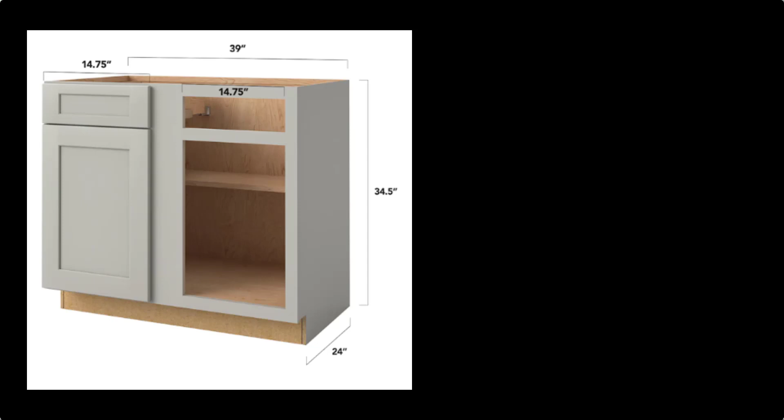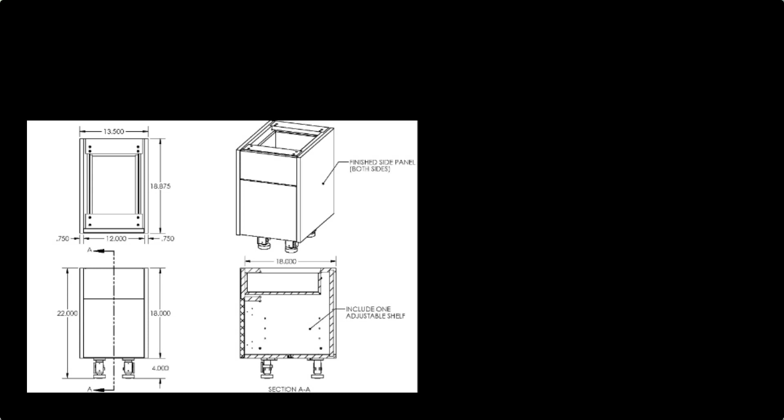Once you know how these little guys are built, you know all the materials, the joinery needed, the assembly. That's when you can start seeing how other millwork projects are made, like closet cabinets and shelving, desks, furniture. It all has the same kind of thought process behind it, just different outcomes. So the goal of this demonstration is so that you better educate yourself, so that when the time comes for you to start planning your own custom millwork, you do so with wisdom and it shows on your elevation sections and details. Those are the typical drawing types needed to help a carpenter build any millwork or casework pieces.

So to give you some background, my family owned a kitchen cabinet manufacturing company. I worked there every summer from 13 years old until I graduated college in my mid-20s. So the cabinet building process I'm about to show you is based on our cabinet building design and process. Please understand there are hundreds of ways to build cabinets, lots of different materials, lots of different joinery methods. This is just one way. So please feel free to look at other woodworking resources for more ways to do the exact same thing I'm about to show you.

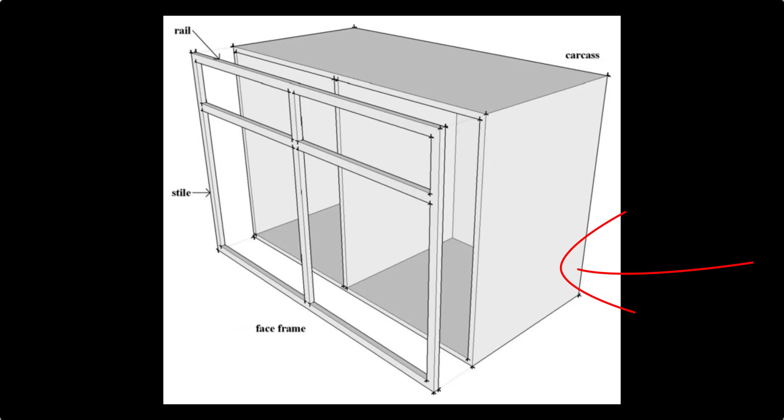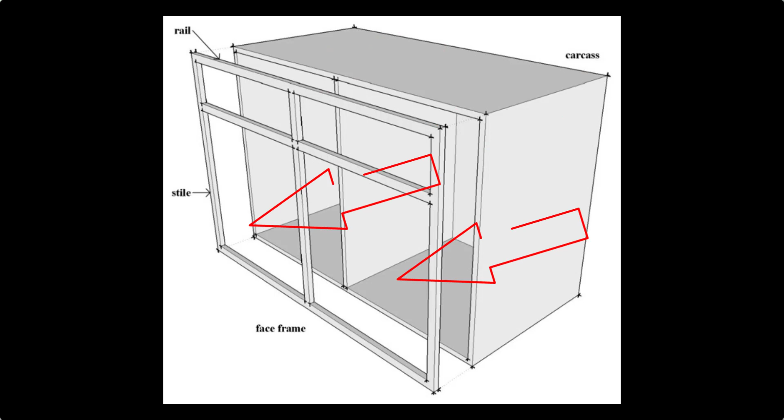The kind of cabinets that my family built were designed with a hardwood face from which the doors sit on top of, and a plywood body. And what we're going to do is design and build a standard 36-inch base cabinet with 2 doors and 2 drawers. So the first step in the process is actually building the face of the cabinet. And there's going to be 4 openings that we need to plan for. So there's 2 openings for the drawers and 2 openings for the doors. How big are those going to be?

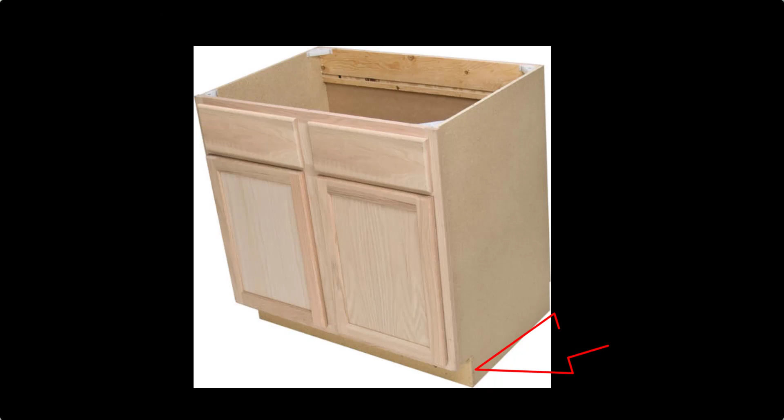Well, we have some other things that we need to take into consideration, like this cabinet needs a toe kick and it also needs a countertop. So in order to figure out the size of these holes, we got to do a little math and a little planning. Now our cabinet faces were typically built with 1.5-inch wide pieces of hardwood that were also about 1 inch thick. So here's how we're going to plan this.

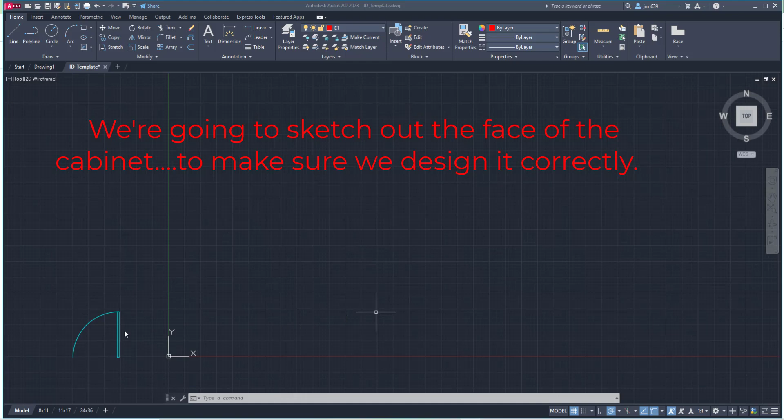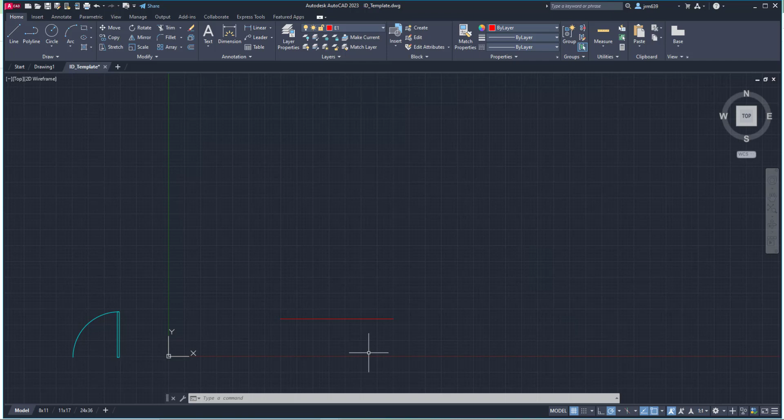I'm currently in AutoCAD and I've got the interior design or the ID template up and running. I have E1 selected as my layer, and I'm just going to draw a line, somewhere around 7 feet. It doesn't have to be exact. But this line is representing the floor line, the floor that the cabinet's going to sit on. Now for those of you who are my students, what height are kitchen cabinets with countertops typically in a kitchen? Anybody? Well, if you said 36 inches or 3 feet, you are correct. So 36 inches high off of the finished floor and then 36 inches wide.

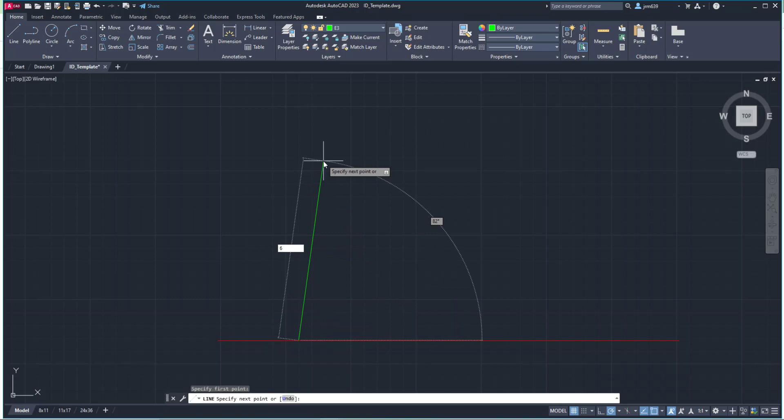So I'm going to come in here with E3. I'm going to use the line command and come over here. Let's go up 36. Let's do a straight line first, why don't we? 36 inches high, 36 inches wide, and 36 inches back down to the floor. Now I can readjust this a little bit. I don't want too much floor to have to deal with, but we just need enough on both sides. It doesn't have to be exact. But this is where the base of our planning is starting.

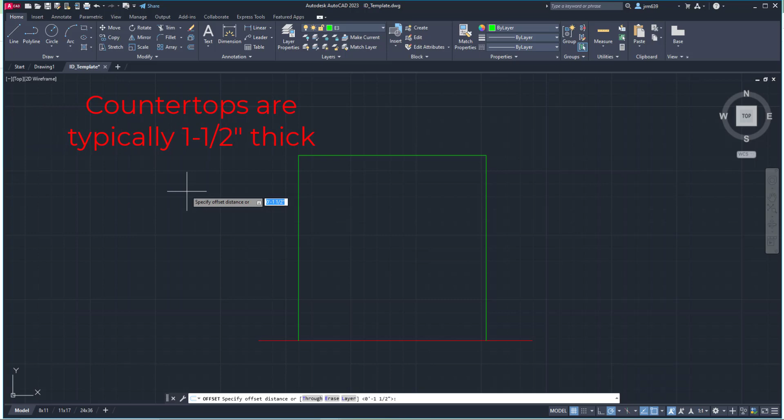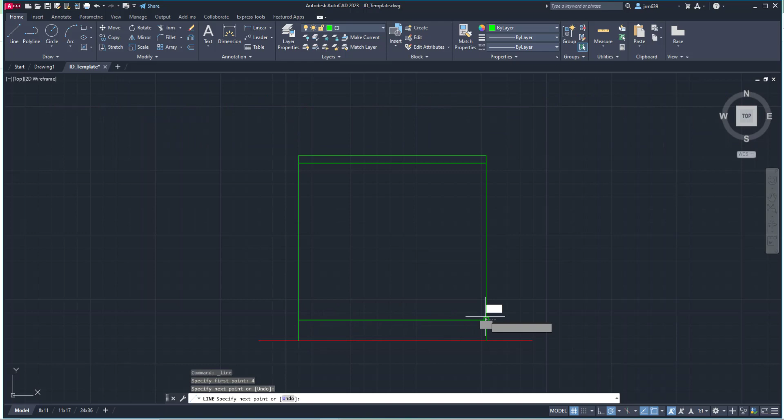So as I said before, this 36 inches includes a countertop. Typically a countertop is about 1.5 inches thick. So I'm going to offset 1.5 inches from the top down, and there's our countertop. There's also a toe kick at the very bottom, and those are typically 4 inches high from the floor. So toe kicks are right here. I'm going to go 4 inches and draw that toe kick in. So far we're doing really beautiful.

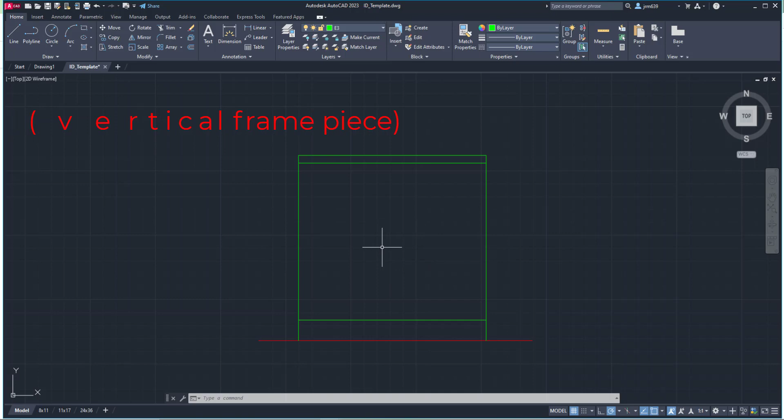Now, like I said, the face of the cabinet is made of hardwood, and ours were 1.5 inches wide. And so I'm going to start on the perimeter and work my way inside. So the first thing I'm going to place are the stiles, which are the vertical pieces of the face that go up and down the full length of the actual cabinet. So I'm going to take my handy dandy line tool. I'm going to hover and then move over 1.5 inches.

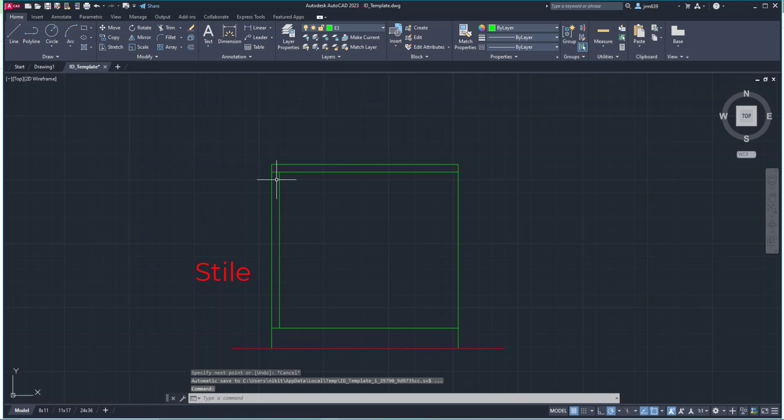And there's that. This is a stile. I'm going to take that line and I'm going to mirror it over to the other side. Do I want to erase the source object? No, I do not. So 2 stiles on the cabinet that are 1.5 inches wide.

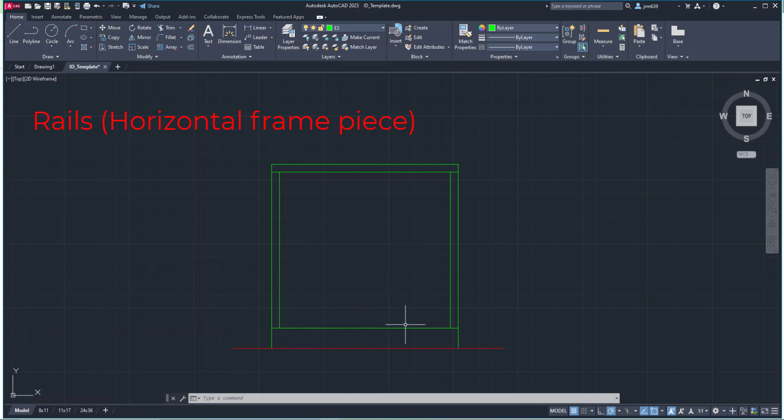The next thing that I have to do is the rails. Those are the horizontal pieces that sit in between the stiles, and they help us kind of start to place where the doors and the drawers are going to be. So on a face of a cabinet, there's always one right underneath the countertop, and then there's always one right above where the toe kick is going to be. So again, those were 1.5 inches wide.

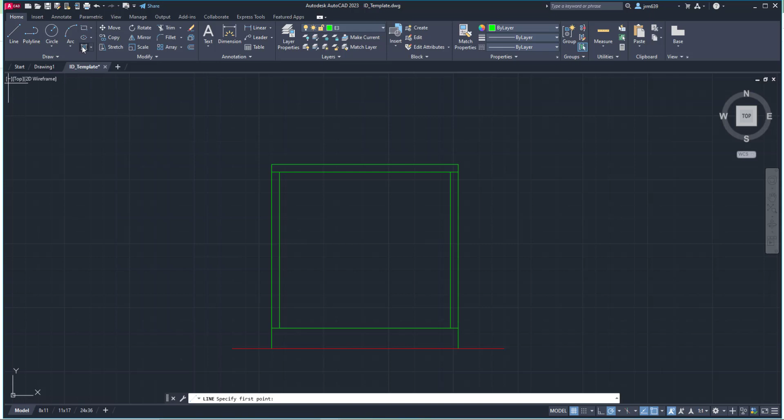So I'm going to grab my trusty line tool, hover, drag up so I get that extension line, and it's 1.5 inches. Excellente. Now I can go ahead and use the mirror tool to get the other one up above so I don't have to draw. I do not want to erase. And here I have 2 rails. There is going to be a 3rd rail, again to separate where the doors live and the drawers.

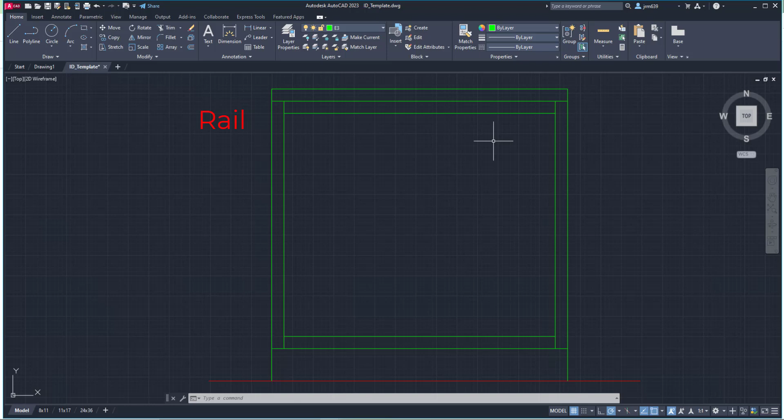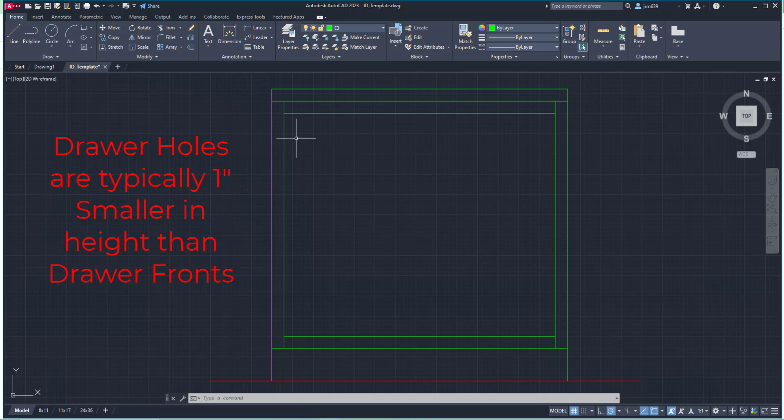But I have to understand how wide those holes have to be up here, like how high they are vertically. So to give you just a basic concept, whatever your actual drawer front size is going to be in terms of height, we usually just go 1 inch smaller. So if I wanted 6-inch drawer fronts, then I would create a 5-inch hole for the height of the drawers. So I'm going to create a little temporary construction line, come down 5 inches because I do want 6-inch drawer fronts.

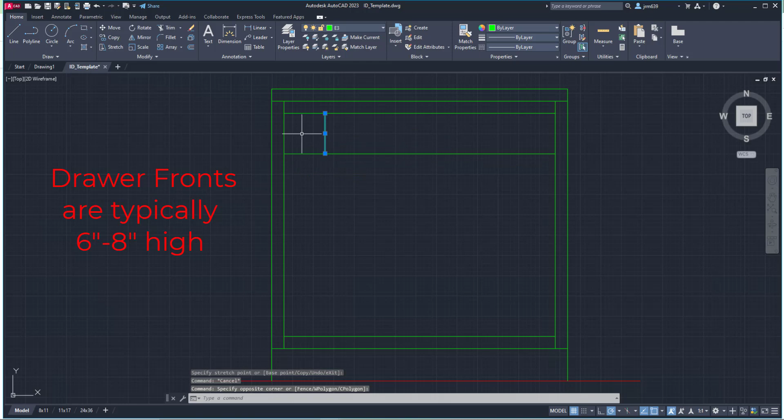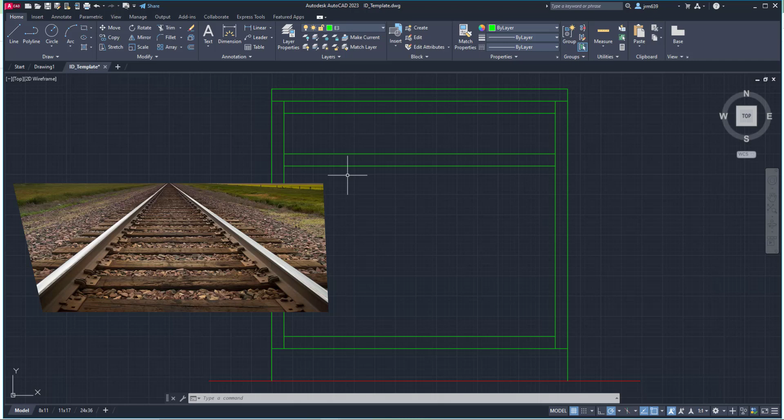And I'm going to draw a line all the way across, and what we're trying to do is install the 3rd rail that sits in between the door and the drawer. Offset that by 1.5 inches, and you have the 3rd rail. Are we starting to see how this is coming together? Excellent. So again, just to repeat, 1.5 inch stiles. Stiles are vertical. Rails, kind of like railroad tracks if you think about it, go that way. They are horizontal, and they just kind of help us map out where everything's going to be.

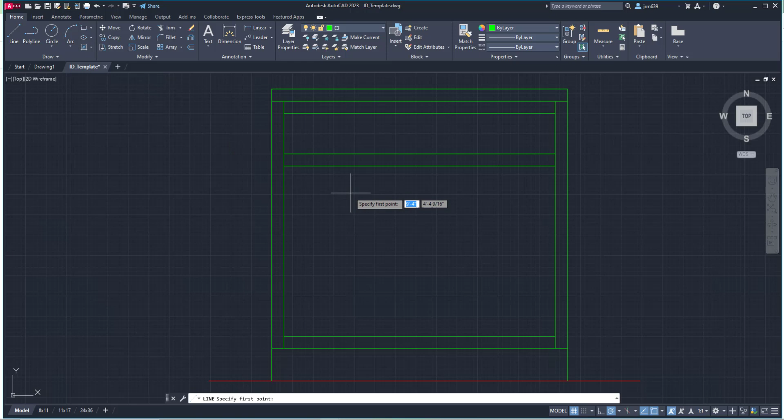Now, because we have 2 doors and 2 drawers, that means that we need to add what's called a mullion. A mullion is kind of like a stile. It's just that it doesn't go all the way up like a stile does. It actually sits in between the rails. And typically a mullion is a lot wider than your stiles. So at our company, our mullions were about 3 inches wide. So I'm going to find the center of this rail and I'm going to draw a line straight down.

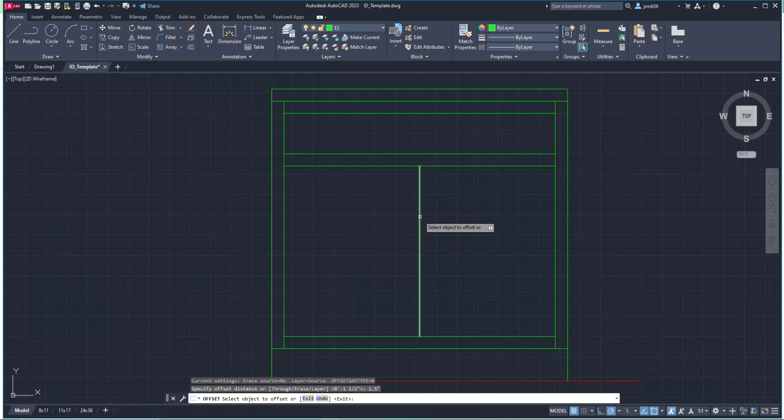If my mullion is 3 inches wide, that means that I get to offset that line 3.5 inches. Haha, just kidding. 1.5 inches. I was just trying to see if you were paying attention. That's all I was doing. All right, I'm going to offset 1.5 inches to the right as well as to the left so that then I can delete that center line, and there's the mullion.

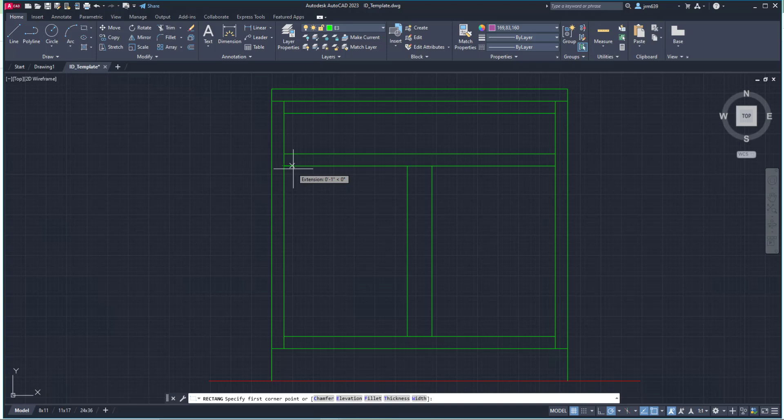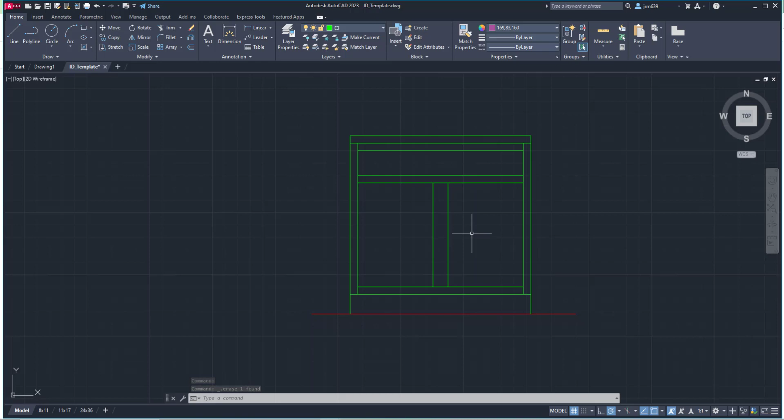So the idea is, and I'm just going to demonstrate this, you don't need to do this, and I'm just going to change colors real quick so that you can see, is that when the door and the drawer fit on top, they are doing something like this, so that they're actually resting on the face and covering up the hole of the cabinet itself. So that's our main goal. But first we have to decide where the holes are and what size things are going to be. Now if you want a really large drawer, you can just leave it like this, but typically what we do is we create a mullion in between the drawers.

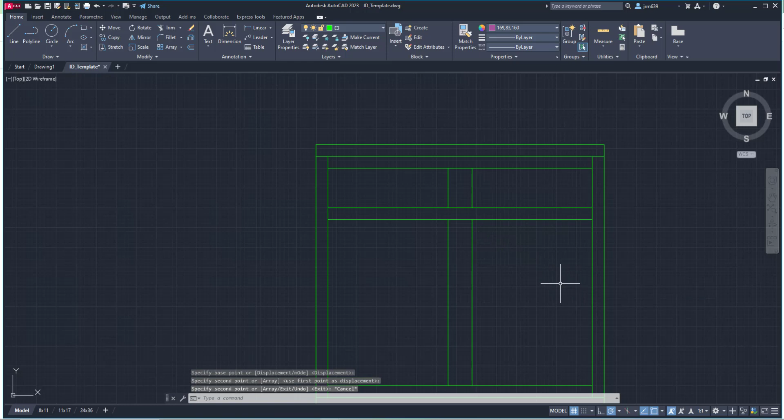Oh, better put my layer back on by layer. And then I'm going to copy that and just use the bottom to help me place that. And there is essentially what our cabinet is eventually going to look like. But sometimes you have to do some planning and some math so that you can figure things out a little bit better. Does that make sense for everybody? I sure hope it does.

All right, so now that we have the face of this cabinet figured out and we know some of the math behind it, now it's time to go into SketchUp, and I'm going to show you how they actually put this face together. And then once we get the face completed, I'll show you very quickly how the rest of the cabinet comes together.